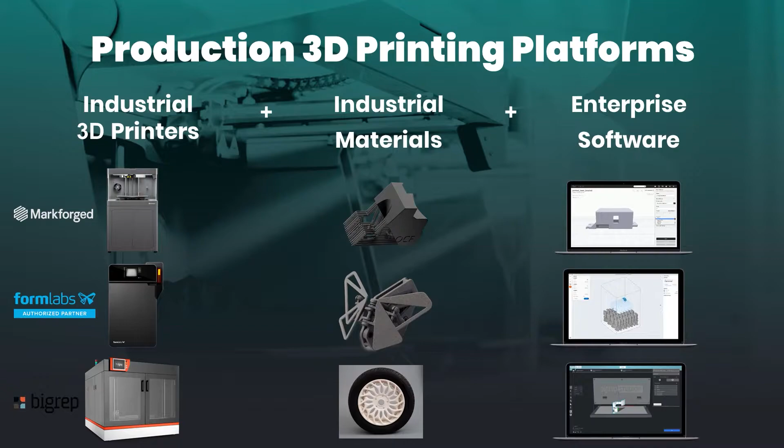Formlabs, another one which I'll go over shortly, that uses a different type of technology called SLS 3D printing, which can be very, very useful for producing larger batches of parts without support structure or anything like that. And then BigRep finally, which are very good for building larger parts or nesting lots of smaller parts together to do production runs. So firstly, Markforged.

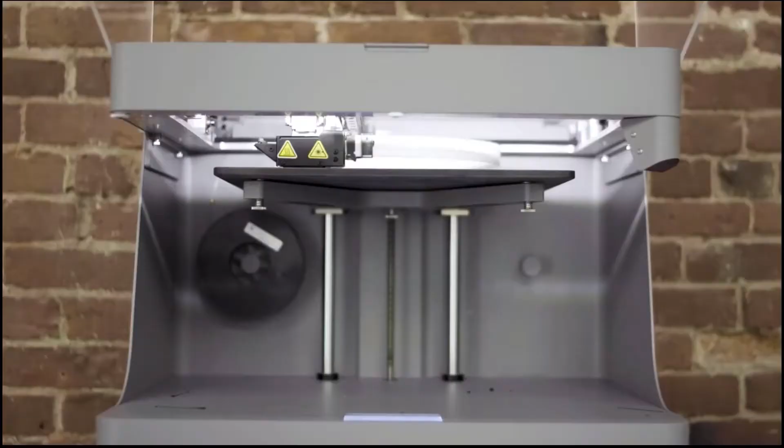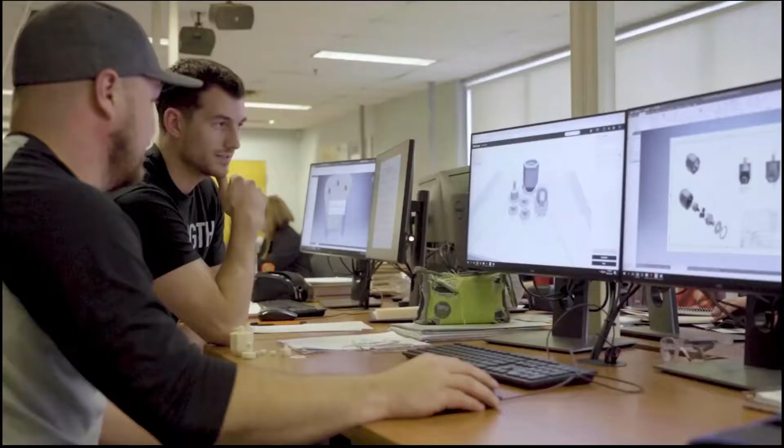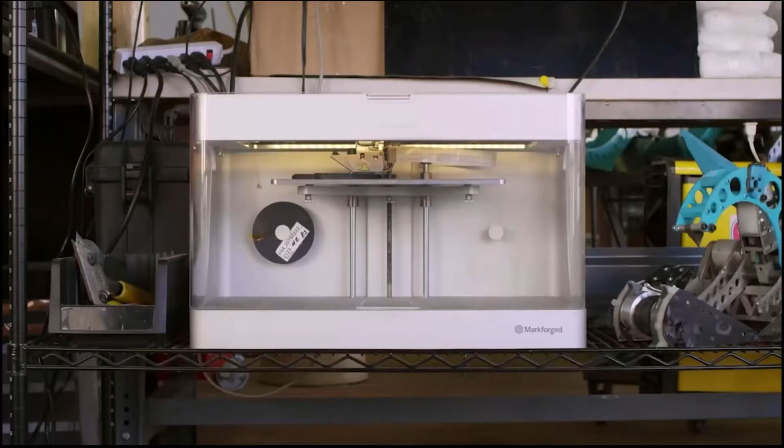Could you break a 3D printed part? Not this one. This part was reinforced with continuous carbon fiber on a Markforged printer. It's 23 times stronger than plastic, with a significantly higher strength-to-weight ratio than aluminum. What does that mean for you? It means that for the first time ever, you can print high-resolution, affordable, complex parts that don't break. You go from idea to end-use part in less than a day. However you choose to change the world, we're here to help you do even more. Reinforce your part with continuous strands of carbon fiber, fiberglass, or Kevlar. Our cloud-based print management software optimizes your print for you, making the transition from CAD to part easier than ever before. Are you ready to bring your manufacturing operation into the next industrial revolution? Request a sample part from Markforged today.

Markforged uses a patented technology called fiber reinforcement. So that allows them to build parts that are stronger than aluminium, but 40% lighter. So basically they'll use a plastic material that kind of acts as the concrete, called Onyx, if you like. And then they will inlay a fiber reinforcement inside that plastic, which is like a rebar running through concrete, which dramatically increases the strength, but isn't visible on the end part.

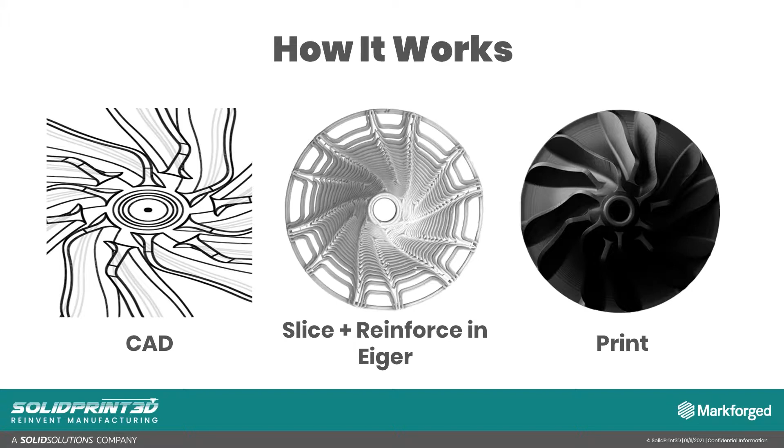So you still end up with really nice surface finishes on the parts, very good accuracy, but inside that plastic, you'll actually have a rebar, if you like, running through it, which is that continuous fiber strand, which can be the carbon fiber, Kevlar, fiberglass.

So you might be wondering, when do I fiber reinforce my parts? You might want to do it when you need something to be very, very strong, like if you're replacing an aluminium component, for example. You'll probably want to fiber reinforce it, increase the durability of a part beyond conventional plastics, and also just optimize it for performance.

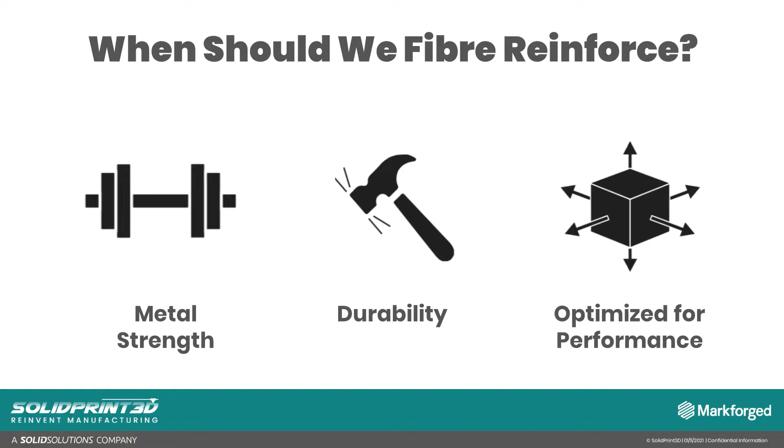So we've got a customer out there that's bending 3mm sheet steel with a 3D printed press tool made on a Markforged machine, just to give you some idea of the sort of applications that you can take on. Lots out there though, which I'll cover in just a second.

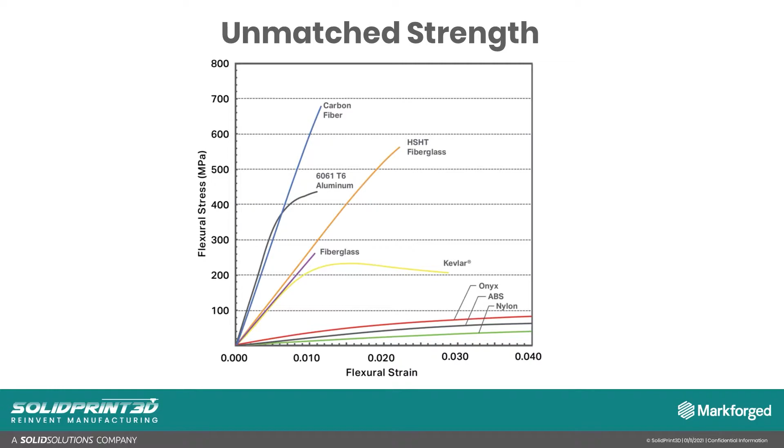So another feature of the Markforged machines is something called Blacksmith. So the industrial Markforged machines have an onboard laser inspection scanner, which not only allows you to produce inspection reports right off the machine, but it also creates a closed feedback loop. So when it's 3D printing the part, it's looking at the design, the 3D design file, and then comparing that to what it's actually printing, and then making adjustments over time to make the printer more and more accurate.

So unlike something like a CNC machine, which will naturally deteriorate and become less accurate over its life cycle, the industrial Markforged machines will become more accurate over their life cycle.

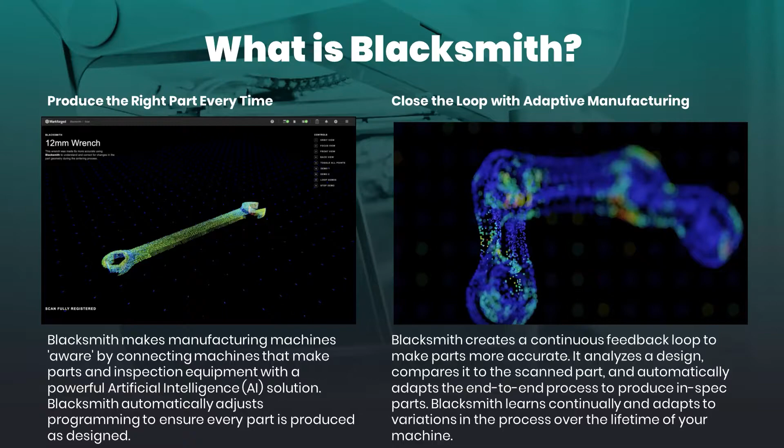So just to give you one quick application, I'm not going to go over lots of different applications, I don't have time today, but just to give you one, this is a 3D printed lifting tool. That's the first CE-rated lifting tool, lifting an engine piston from a shipping vessel, which weighs about a ton, which was previously done with this steel tool that you can see up the top right, that's in yellow.

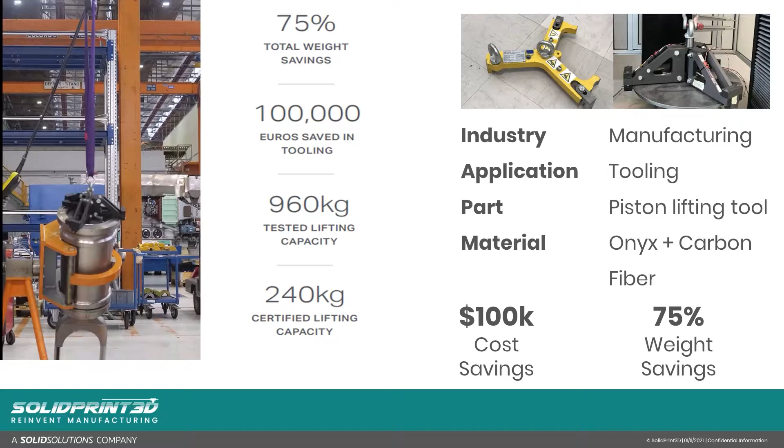So we've now switched to a Markforged 3D printed lifting tool, carbon fibre reinforced, and that's allowed this customer to save a significant amount, not only in weight, which was 75%, but also in cost as well, around $100,000. So pretty significant savings with this case study in particular, but it also shows what sort of advanced applications you can take on with Markforged 3D printing.

So just to give a summary of the different applications that you should be thinking of applying this technology to, one would be high strength and lightweight end use parts. One example of that would be something like a motorbike brake lever. It's made out of aluminium at the moment. You want it to be lighter, stronger, and then you're going to bring the cost down massively.

In-house things that you can tackle with this would be jigs, fixtures, and tooling. So that press tool that I mentioned earlier would be one of the more advanced applications, but assembly jigs, inspection fixtures, all manner of things along those lines. If you have anything like that, feel free to reach out to us and we'll start a conversation.

End effectors and assembly line items, assembly guides, engineering materials that you might need as well in the automotive and aerospace industry. If you need fire retardant and ESD safe components, those kind of advanced materials are ones which we can print on the Markforged 3D printers.

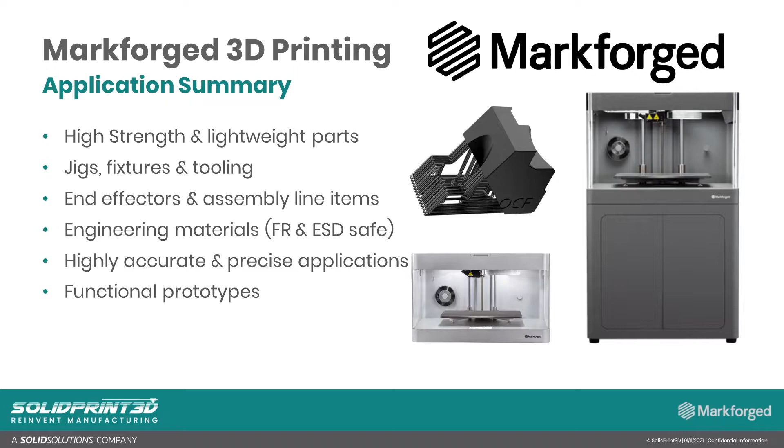And for any highly accurate and precise applications where you're thinking of applying 3D printing, Markforged would be the brand that we'd recommend for those kind of more advanced parts where you need them to be meeting tolerance. And finally, functional prototypes.

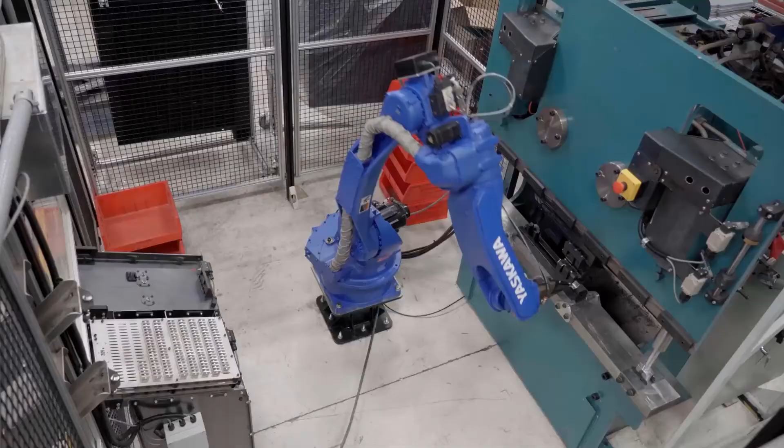One of the big challenges we had with the bending cell was to basically design and integrate everything in a really timely fashion. We were able to actually do it in about 6 months, and that would not have been possible without the additive. We found Markforged by researching for the best printers out there for commercial and industrial quality printing. One of the parts we make at Lean Machine is an aluminum wire clip like this.

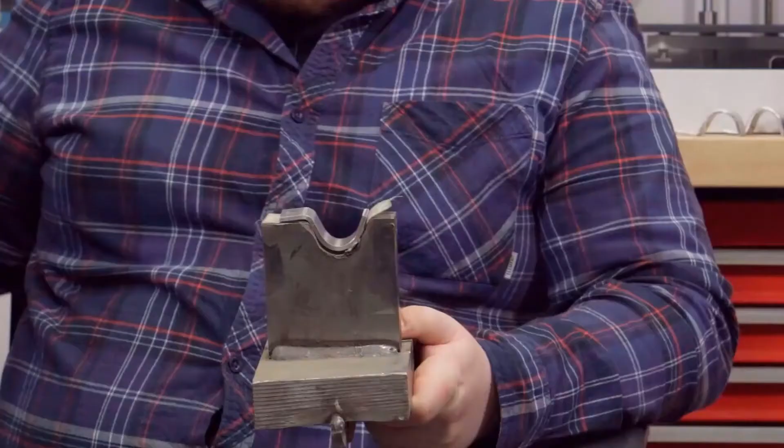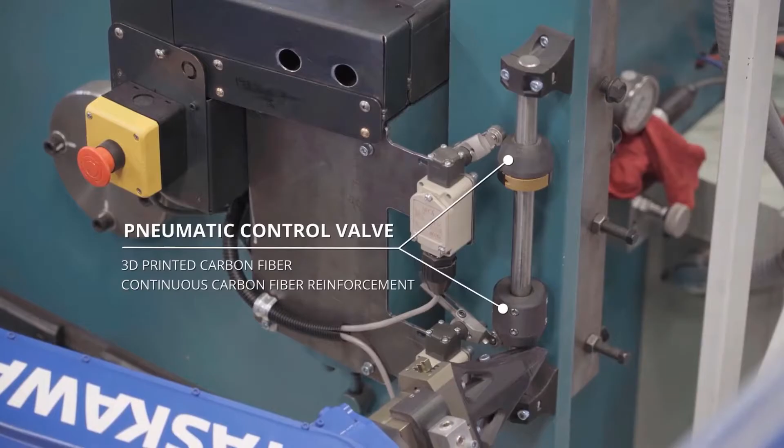The tooling in general, what we used to use was big heavy steel tooling like this to put in our press brake. So one thing we found we could do with printing was actually print these tools instead. The big thing that we saw with Markforged was it took a big step from a hobby printer to something that you can actually make parts out of. We saw a few sample parts and then we kind of jumped in with it and haven't looked back.

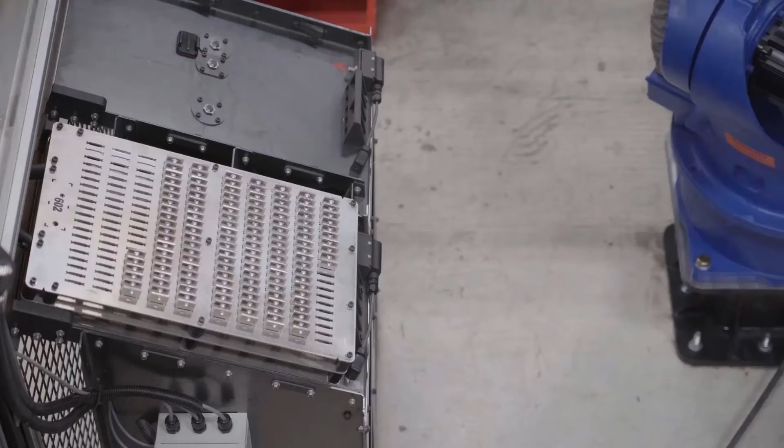So the first step is that you load the blanks into the trays, which hold 200 parts each. After that, the robot picks the parts out of that tray using an array system and then takes it into the press brake to bend them one at a time. Because of the 3D printing, you have complete control over the profile of your bend.

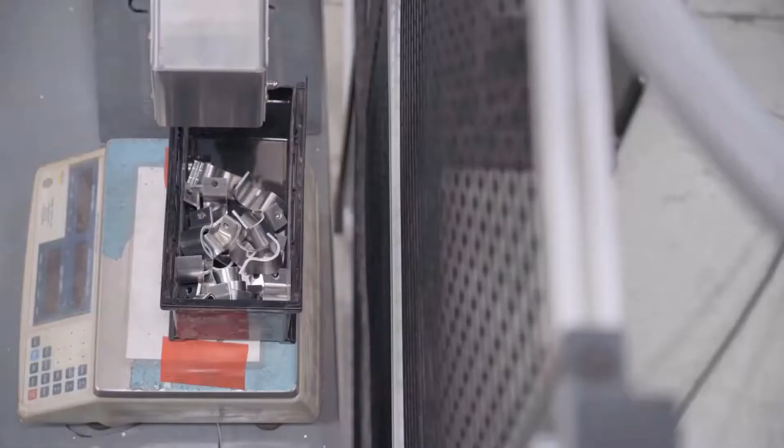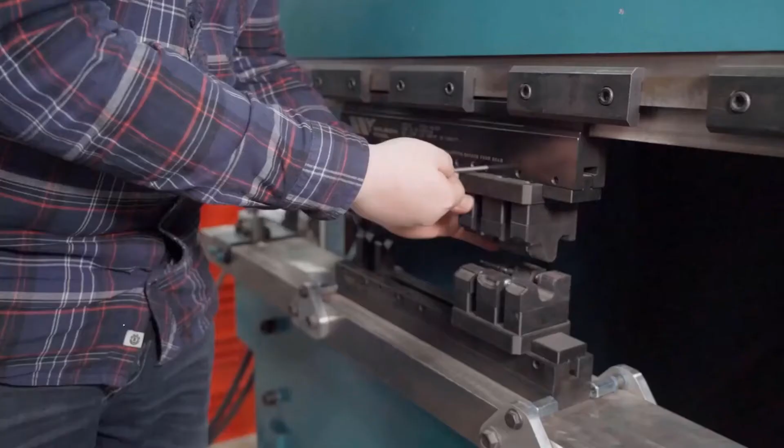The Onyx is actually very good for friction and it doesn't leave any marring on the part at all. So we have a much nicer part with the printed tooling and it's easier and cheaper to make the tool. So it's kind of a win-win. With the continuous fiber, we make a printed part that not only could compete with aluminum parts, but in many cases actually be a better part.

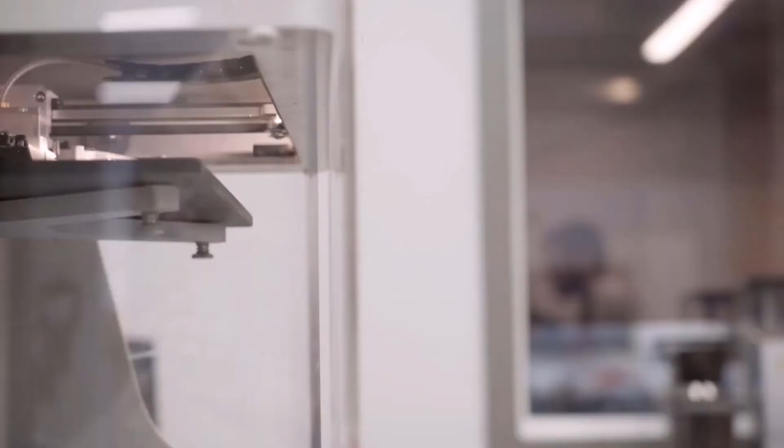So one of the biggest real gains that we found with the 3D printer is that if we want to get parts made, we don't have to go and schedule them out in the machine shop. We don't have to order tools. We don't have to make drawings. We can skip all of that and just get the parts made on the printer. We come in the next day, the parts are ready, we can start testing with them.

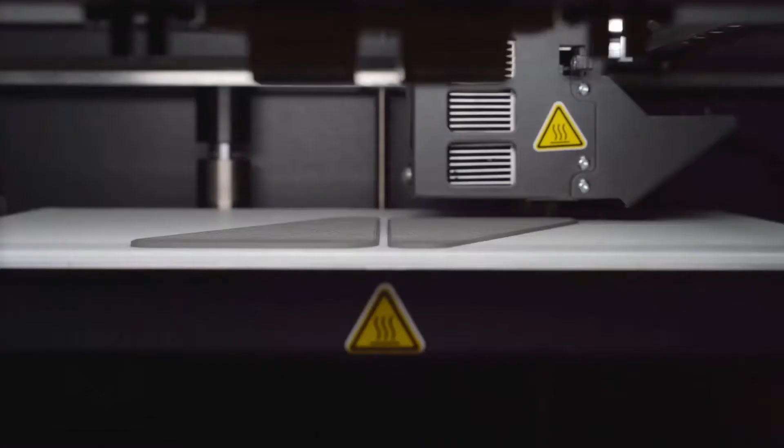And we don't have to go and check that they're right. And being able to have every single feature on a printed part coming out within 2 or 3 thou with Z accuracies of less than a thou. I mean, the accuracy stuff is huge. It's like, okay, these guys can pretty much do anything.

So that brings me on to our next production 3D printer, which is produced by Formlabs, which is pretty new to the market, came out earlier this year. And that's the Fuse 1 and Fuse Sift.

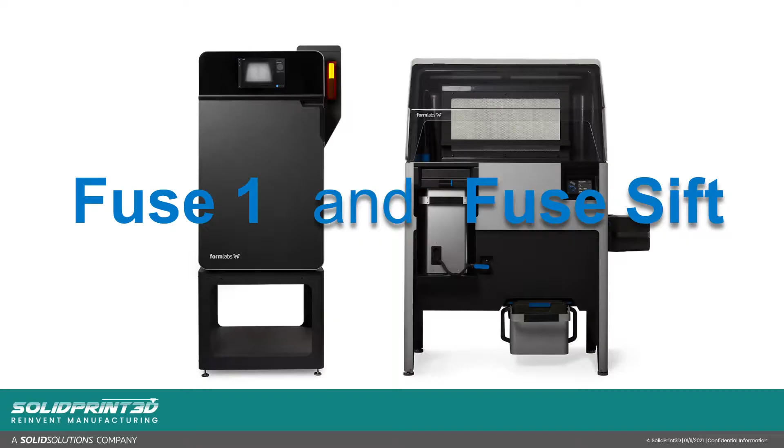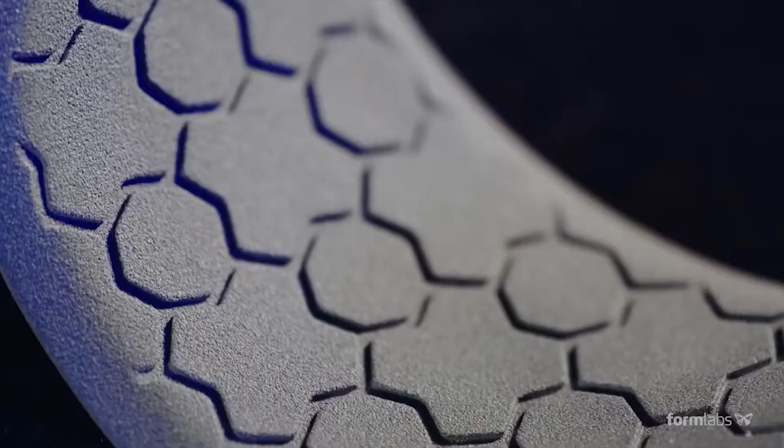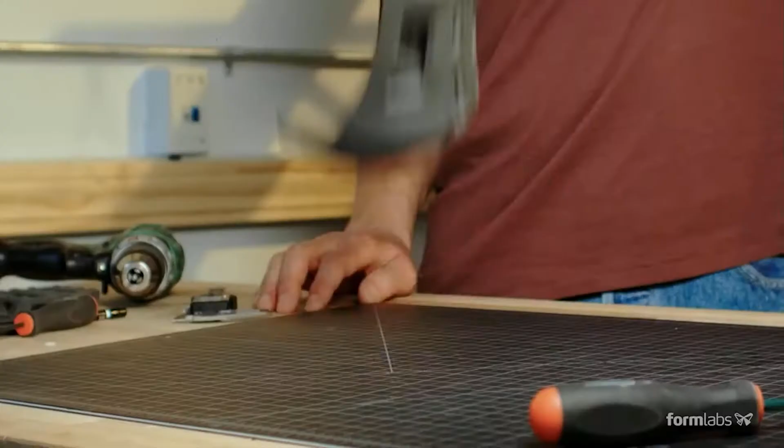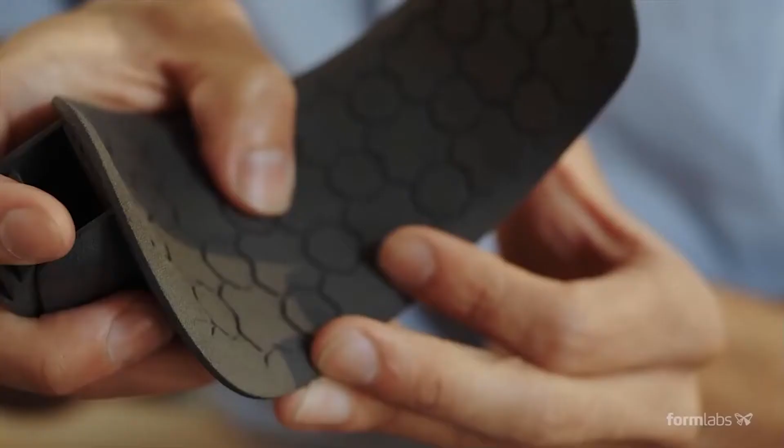Design and manufacturing workflows are closer together than ever, but our ideas still often exceed what we can physically realize. A new wave of independent manufacturing starts now with the Fuse 1, an affordable, compact SLS 3D printer with an intuitive workflow. Selective laser sintering, or SLS 3D printing, is relied on for printing strong, functional nylon parts. In the past, SLS has been too expensive and difficult to use for many businesses. The Fuse 1 allows you to fabricate production-ready parts and high-performance prototypes. Control your entire process from iterating on your first concept design to manufacturing finished products.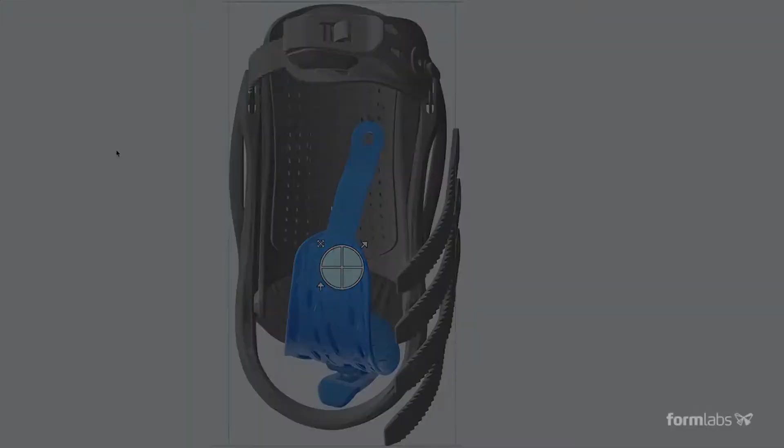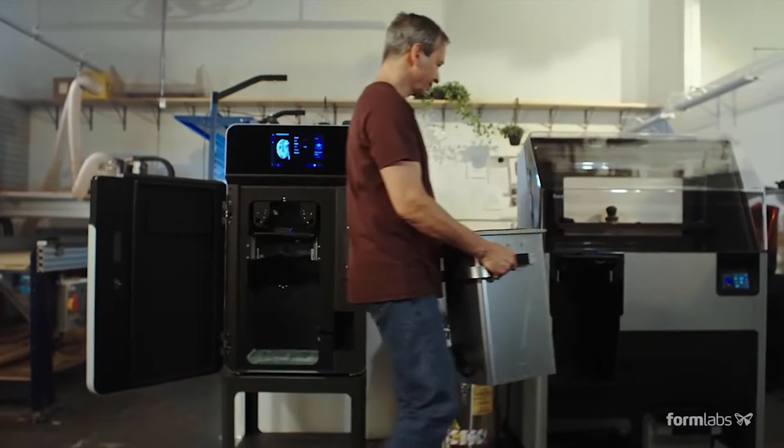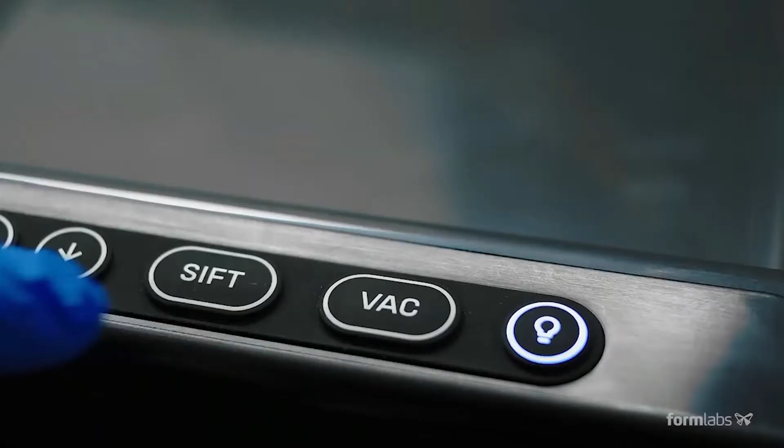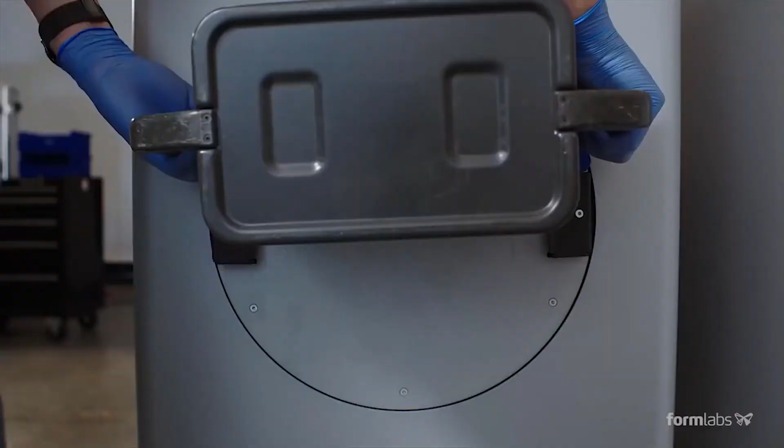The process starts in PreForm, our print preparation software. PreForm's part packing algorithms can automatically arrange many models in a build. During setup and printing, the touch UI walks you through every step. Monitor your print from the touchscreen or from your computer via the integrated live camera. Once your print is complete, transfer the build chamber to the Fuse Sift. This safe, efficient powder recovery station completes the workflow. Fuse Sift will automatically dispense and mix used and new powder after you set the ratio. Reduce waste by recycling powder at a 30% material refresh rate. This means you can print with up to 70% recycled powder.

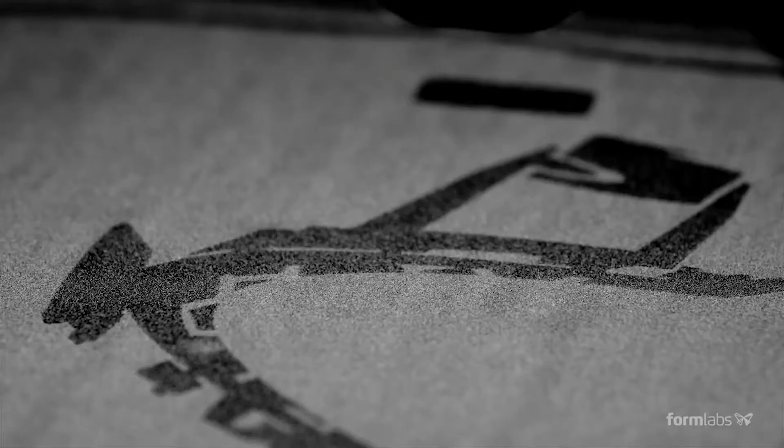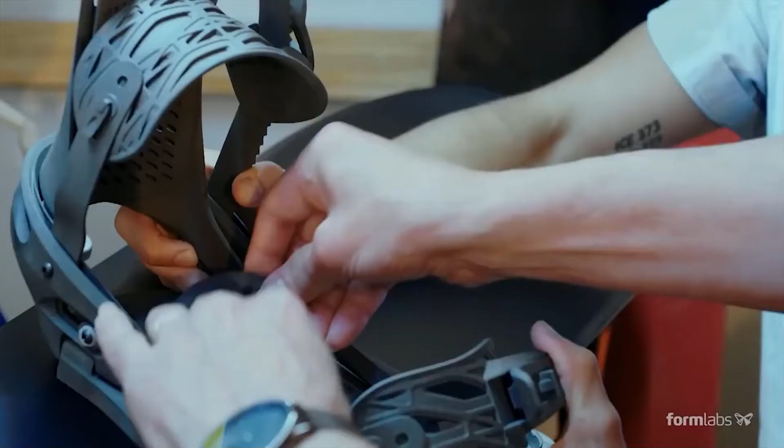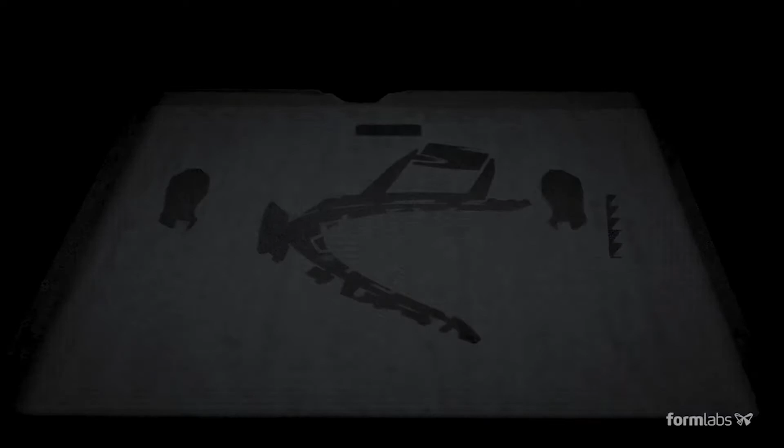After you've transferred a completed build to Fuse Sift, swap out the entire build chamber from the Fuse 1 for non-stop printing. SLS 3D printing fuses nylon powder layer by layer. The unused powder supports the parts during printing, so you can create complex, interconnecting designs with no need for support structures. Nylon parts balance strength, flexibility, and detail, so prints are ready for rigorous functional testing or to ship ready-to-use products to customers. It's time to rethink product development and take control of your own manufacturing. The Fuse 1, production SLS, finally within reach.

So Fuse 1 and Fuse Sift use a technology called SLS 3D printing. So unlike Markforged, where it's basically taking a filament and then melting it out of a nozzle and then building up the parts layer by layer, this technology SLS will use a laser and a bed of powder. And basically when the powder gets hit by this laser, it gets sintered together to build your part out of the powder. So what sort of benefits are there of using SLS in production?

We're using proven end-use materials. So nylon 12 would be the main material that we print in most of the time, but we also have nylon 11 available to us and another couple on the horizon. But you can look at a nylon 12 datasheet off the Formlabs Fuse 1, and you can see that it's biocompatible, fire retardant, and you can apply that sort of material to existing applications. You don't have to get those materials recertified for your application. Nylon 12 is a pretty well certified material already.

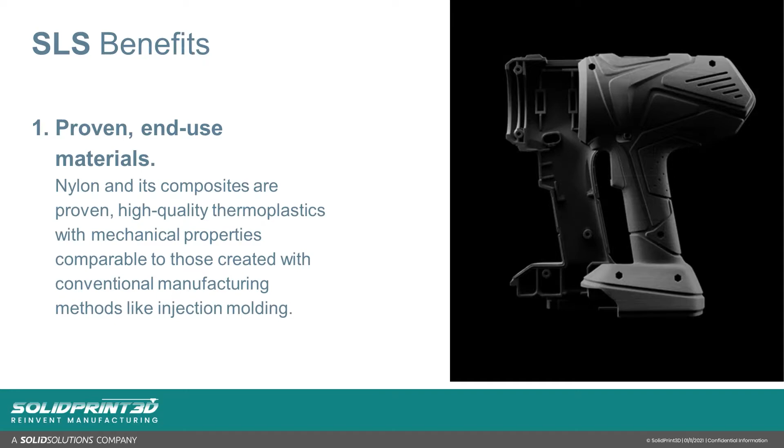So the further benefits of SLS is opening design freedom. So because the parts are all self-supported in this powder, we don't ever have to build things like support structure. The detail is defined by a laser dot, so we can do very fine amounts of detail. So this 3D printer in particular, I would say, any sort of geometry that you have there, you can throw at this 3D printer and it's going to be able to deal with it.

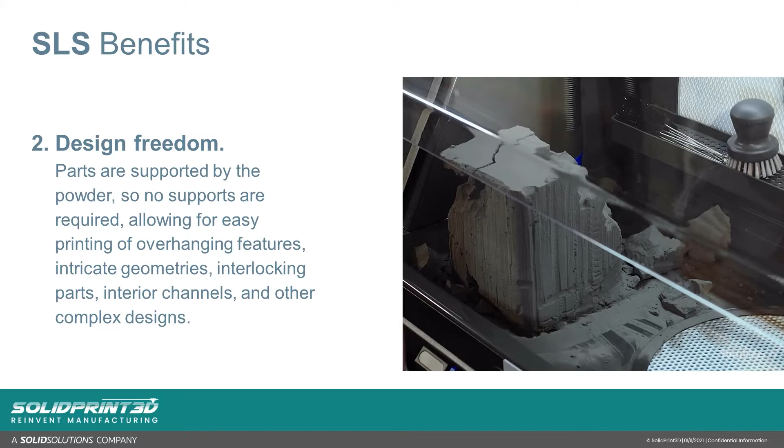So we can make very complex, intricate structures, and we're not having to go back to the drawing board after a 3D print wondering why this didn't work, or why is it taking so long to clean up this, that, and the other. It will just print what you give it. It's a very, very flexible technology. So the other benefit of SLS is it's very high throughput. So because we're nesting parts in this powder, we can nest parts one above the other.

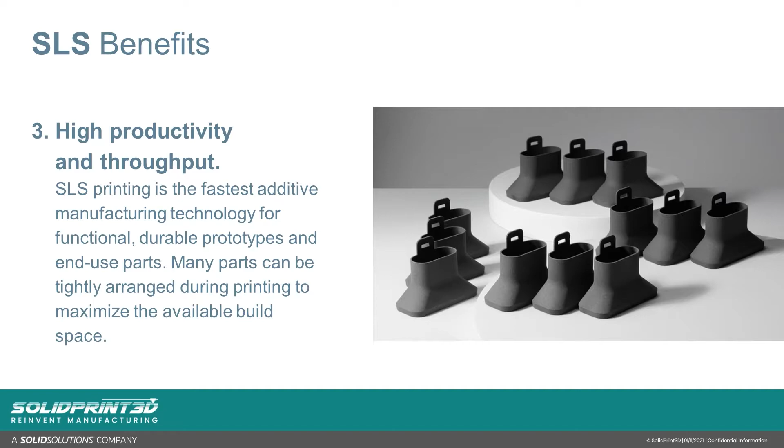We can totally fill that 3D volume with parts. And the cost of the materials as well is not all that much either. So if you're looking at doing small production runs of parts where nylon 12 material would be suitable, this is a very, very competitive solution, with the Formlabs Fuse 1 SLS technology now being at around £14,000 for the printer, and then £6,000 for the sift. And then with everything you need to get started, it usually comes to about £30,000.

Whereas SLS technology before the Fuse 1 was released, any industrial SLS machines were around 100k plus. So the price point has massively been brought down for this technology, and it's very, very competitive with injection molding even on small production runs. And then you also get the added benefits. You can change your design whenever you like. You don't have any sort of design constraints.

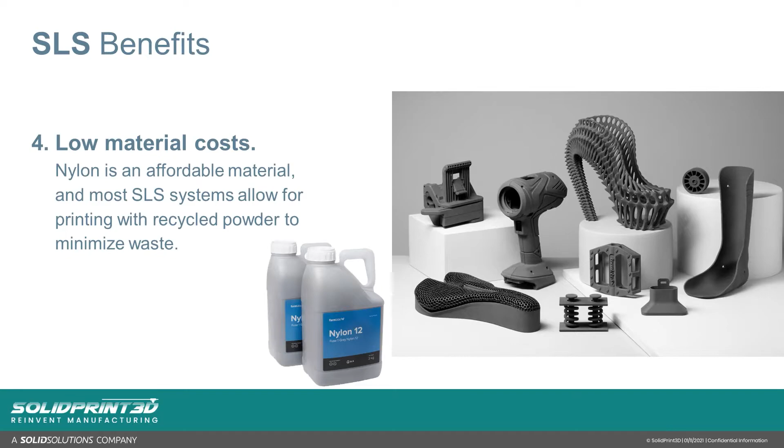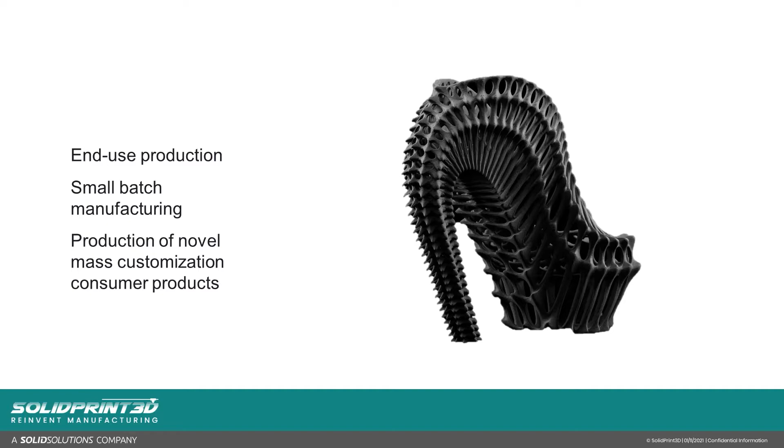So as I mentioned, the applications of the Fuse 1: end use production, small batch production, and production of very novel and intricate designs. Because nylon 12 is biocompatible, it's also very, very useful in the medical industry. So lots of medical prototypes, and also the fact that we can print any sort of geometry. So even like anatomical models, anything along those lines, it's very, very well suited for those applications as well, and fully biocompatible and sterilizable parts.

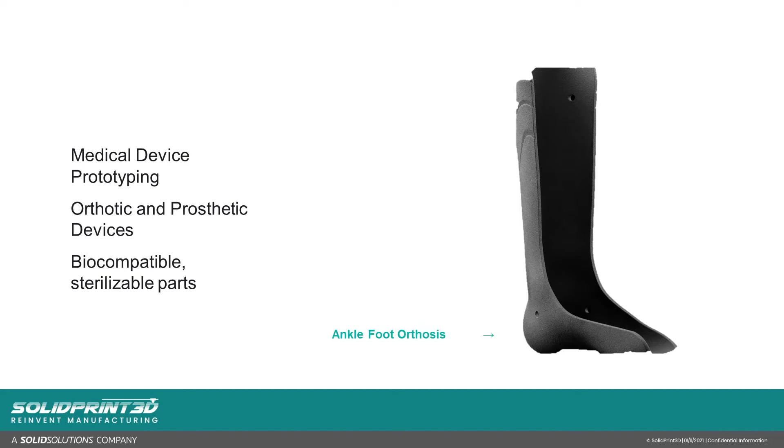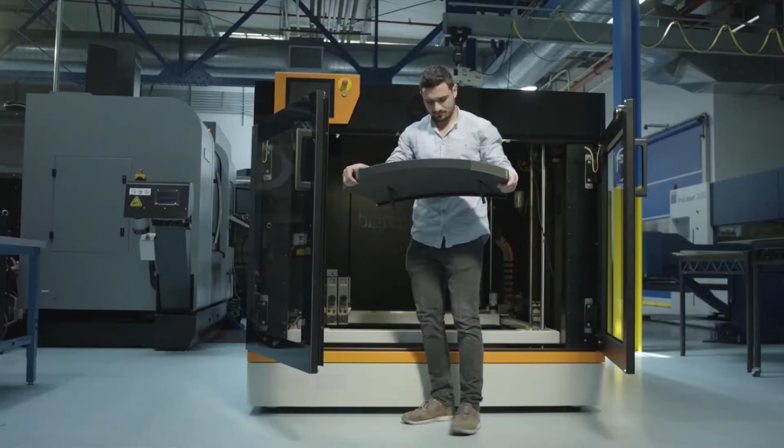So the other production 3D printer would be BigRep. So BigRep produce very large FDM machines. So they basically take a filament and then heat that and then extrude it out of a nozzle, similar to Markforged, but they don't have the patented continuous fiber reinforcement technology. They're just extruding a plastic. So these 3D printers are around a meter cubed build volume. The BigRep 1 suitable for prototyping applications. The Pro and the Studio G2 better suited for advanced end use parts and production applications.

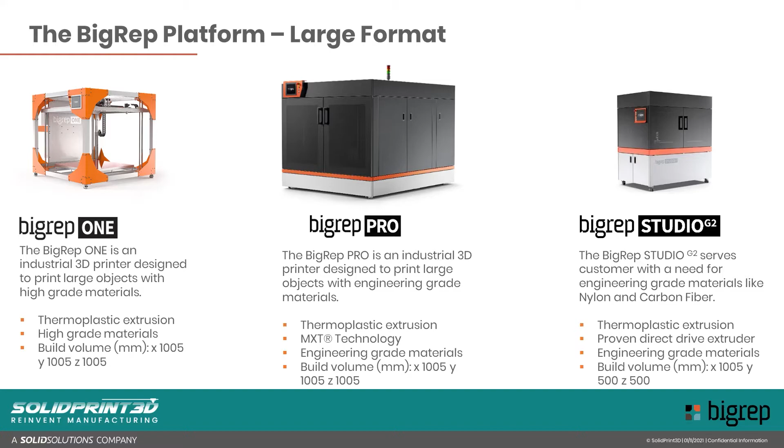So why would you need a large 3D printer? If you have large parts that you need to be printing, it's pretty straightforward, one-to-one scale parts, then this is a very good option rather than joining small parts together and going down that avenue, which can take a lot longer. And also BigRep are a very reputable brand based in Berlin in Germany, and they have many industry partners which they've developed materials with, and the engineering grade materials that they have available are very, very good. There's carbon fibre reinforced materials in their portfolio now, which are great for taking on advanced applications in aerospace and automotive.

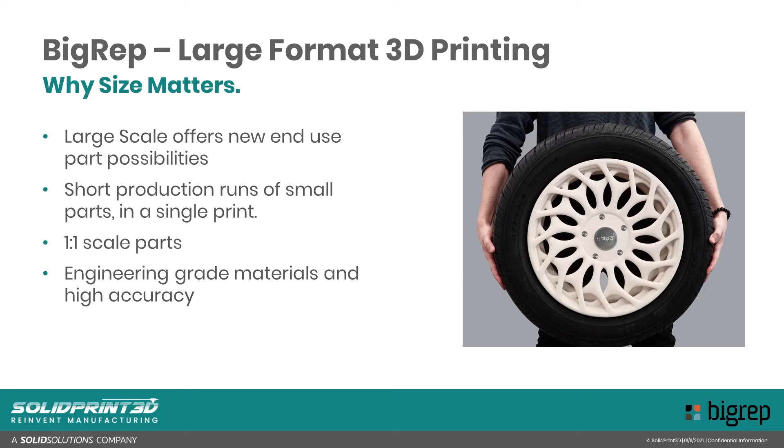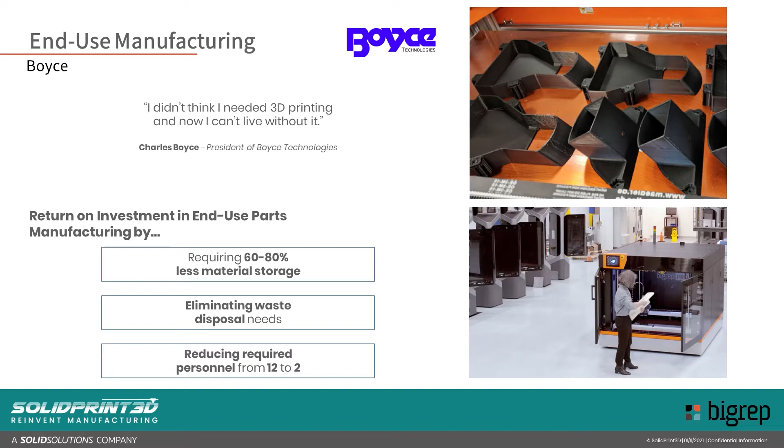We have a customer using a BigRep machine for producing some jigs that are being used to hold helicopter blades together on shipping vessels for the MOD. So, a very industrial solution. And just to give a couple of applications of where you can use BigRep 3D printing is end use manufacturing. You can nest lots of parts in the build area that would be very tricky to machine geometries, and then just leave it running over a weekend, and 3D print all of that production run.

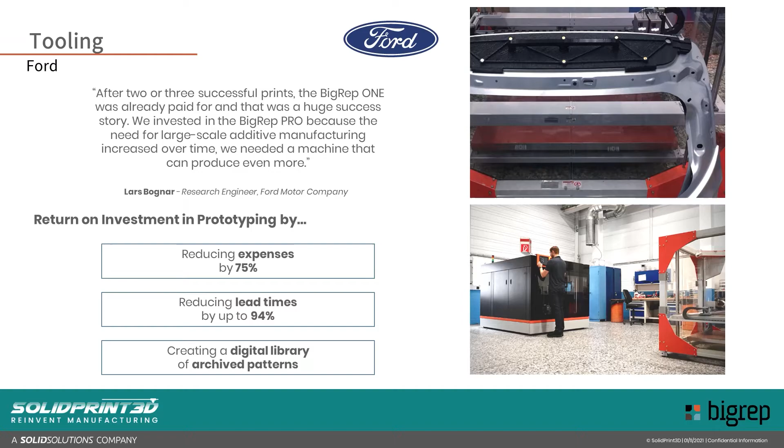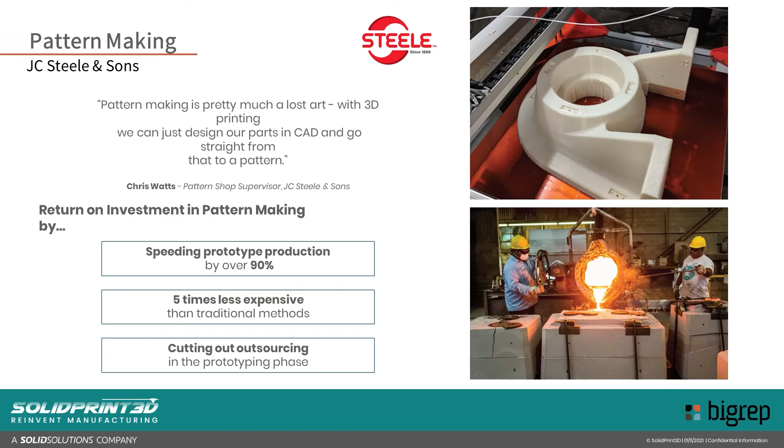Large jigs and fixtures as well on assembly lines. So Ford using them for their assembly jigs. Then also patterns as well is a very good application. So sand casting patterns, investment casting patterns, both of those good applications to use a BigRep for, especially if you're needing to do large patterns.

Also things like you wouldn't think of, like 3D printed casts for the construction industry. You can take these out onto site relatively easily, cast concrete into them, rather than having a big kind of MDF structure making up your mold that you'll be casting into. Just use the 3D printed one.

So just to summarize, why would you use production 3D printing over conventional production options? Your inventory, you can turn your inventory from a physical one into a digital one, so reduce overheads massively rather than having parts sitting on the shelves. You just have your digital inventory and you 3D print those parts as you need them. Production costs as well, especially if you're doing small production runs or just a few parts, you don't know what your demand's going to be.

It can work out far, far cheaper to 3D print your parts rather than outsource the manufacture of those, especially in the case of things like aluminium parts. They can become really costly, and if you can 3D print those on a Markforged machine, we see really big return on investments there. And manufacturing as well, you can bring that in-house, have more control over your supply chain, rather than having hold-ups along the way at different stages.

And logistics as well, there's also environmental impacts to take into consideration here. If you're 3D printing your parts in-house, there's far less moving about of things, and the process as a whole is much better for the environment. New product development as well, you can develop your new product on the machine that you would actually be looking to do the production on.

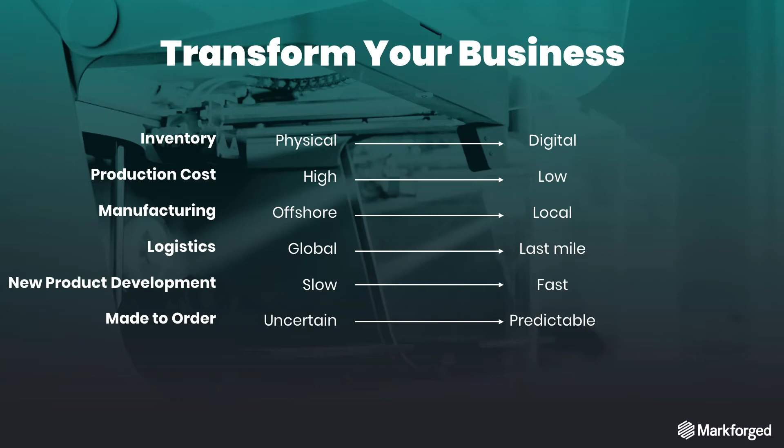So if I was developing a product for the Fuse 1, for example, I can start doing the prototyping on there, part fill the build chamber, so not do a full 3D print filling the whole volume, just do a couple of parts, and then when I'm happy with that, I can scale that up on the same machine, really reducing the amount of unknown elements in that process, because I've been using my production option at the prototyping stage. And then also, made to order, as I covered earlier, you don't have to have minimum order quantities. You just print off as many as you need from your digital inventory.

So I'm going to cover some 3D printers that we'd recommend for prototyping only. I've covered the more advanced 3D printers for production applications, which you can also use for prototyping, and they are very good for prototyping. But if you're just looking to get started and dip your toes in, these machines would be the best ones to start with just for prototyping, and then you can look at moving into production after that if you'd like.

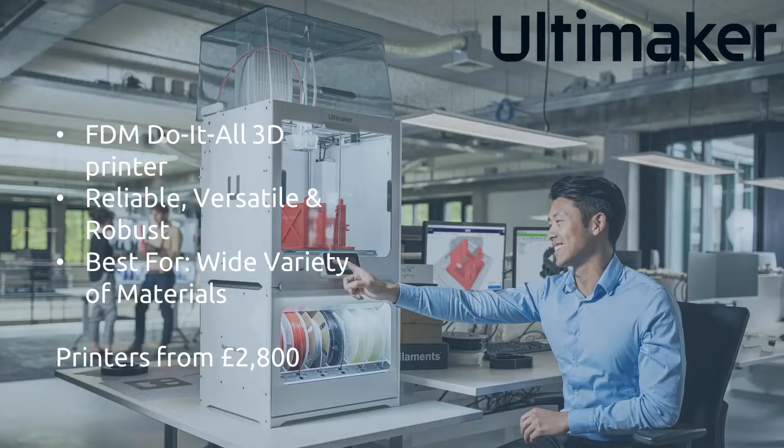Ultimaker, a very, very good brand, very reliable 3D printers, very versatile with a huge range of materials available to them. There are many FDM 3D printers out there that are open source, whereas Ultimaker is one of the most reputable brands and is highly regarded as the easiest to use, the most reliable due to the material profiles that they have set up. And also the software that they use is considered industry-leading software for open source FDM printing. There's an industrial 3D printing company using their software on their £50,000 plus printers, which they've just reskinned. So the software is top-notch.

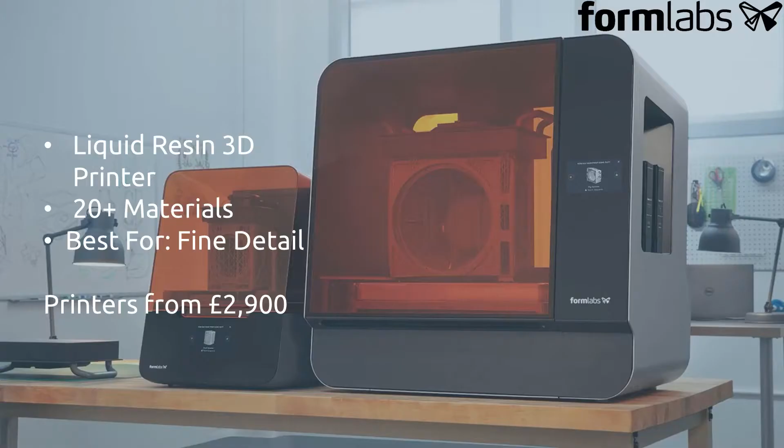Formlabs. So Formlabs also do SLA 3D printers as well as the SLS one, which I covered earlier. The difference being that these printers print parts from a bath of resin, and the parts you get off of these machines have the best surface finish available. So these 3D printers are really well suited for places like design consultancies, where you might be prototyping any sort of small product that you might put on Dragon's Den, because the finish that you get off of the machine, the parts look like they've been injection molded.

It's very difficult to determine whether it was printed on a Formlabs SLA machine or if it's just been injection molded. You can barely make out any layer lines. The materials on these as well are very, very diverse. So you can print in anything from a rubber, elastic material to something that replicates a nylon, to something that's very rigid with fiberglass particulate in it, called Rigid 10K resin. And there's also two of these machines available, the smaller Form 3 and the Form 3L for printing larger parts.

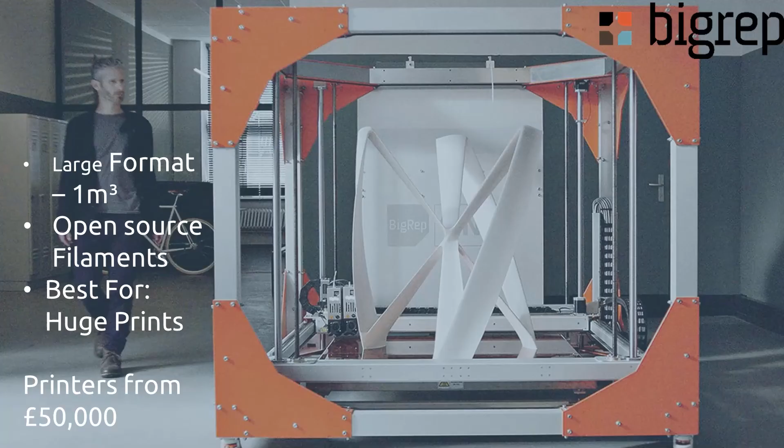And finally, the BigRep One, which I covered very briefly earlier, very good for producing large-scale prototype items. So for production, we would probably recommend the BigRep Pro or the Studio G2 due to the enclosed volume and heated chamber, which basically allows it to produce more dimensionally accurate parts. The BigRep One, however, will do a very good job of mocking up large parts, but if you need to be working to fine tolerances and in advanced engineering grade materials with carbon fibre particulate, then perhaps the BigRep One won't cover those things, but for large scale mock-ups, it's great.

So what else might we be able to help with? So some new technologies I'm going to go over now, which many of you may not have applications for, but it's interesting to know about, I think. So we have a new machine that will 3D print electronics in three dimensions called the Nano Dimension DragonFly. So with this machine you can basically print a circuit board, so you have components on the circuit board nested one above the other on the board.

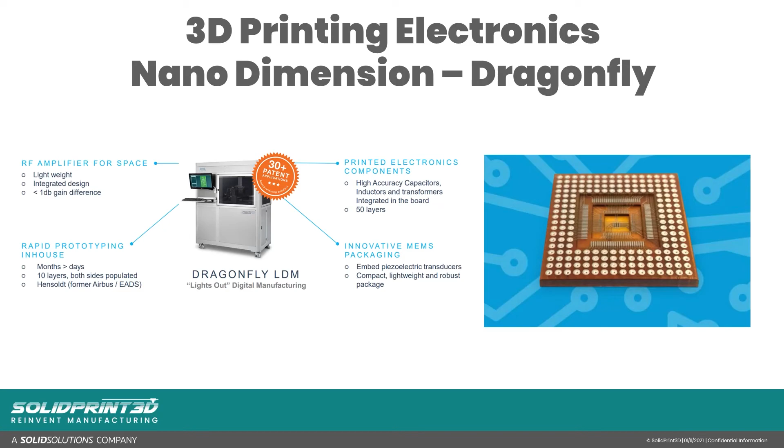You can integrate things like RF antennas that would usually be a separate PCB item into the same circuit board. So there are many things that you can do to improve your PCB designs, and most importantly, reduce the overall size of them, because you can do things like side mount components onto PCB boards. With this sort of technology, you're working in three dimensions, whereas previously you'd be working in two dimensions. So very, very interesting technology, and that leads me on to our next technology, which is new to the market, which is the Massivit M1000.

So this machine will produce autoclavable composite mold tools. If you know anything about the composite mold tooling industry, it's very, very expensive to get composite mold tools produced. It takes months and months to get them delivered, whereas this technology is looking to streamline that process. So we'll be able to produce epoxy composite mold tools right off the machine, and then you can start doing your carbon fiber layup onto those printed mold tools, massively reducing the costs and lead times associated with that.

Some other 3D printing technologies claim to be able to do this, but what you will find is, because they're printing in layers, when they put their mold tools into an autoclave, the thermal expansion is not uniform, so they'll expand more in the Z-axis rather than the XY. Whereas this uses a new technology called Cast In Motion. So it's actually casting the epoxy resin into a void that it creates by printing two walls of material to produce your composite mold tool.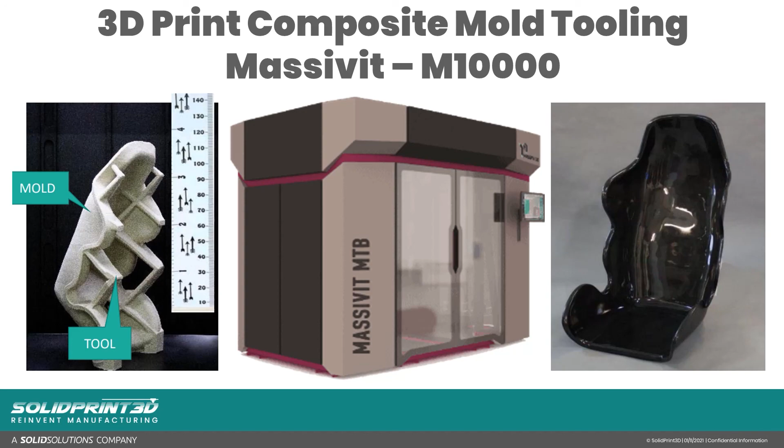When that part is finished, it is isotropic in strength. So when you put it in an autoclave, it will expand uniformly in a way that you can predict, which is very important for advanced applications like in aerospace, where you need to retain a high degree of accuracy and meet tolerances. So thanks very much for listening to the 3D printing segment.